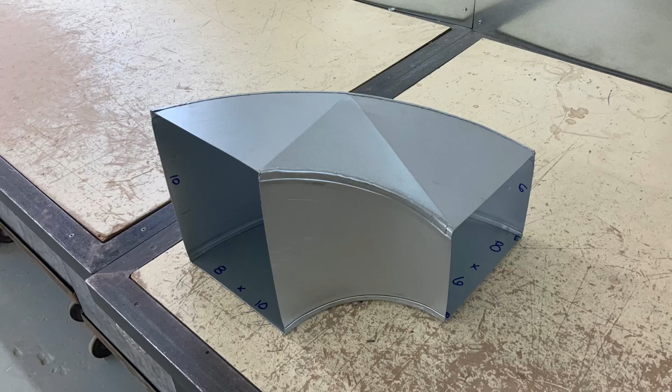Today's fabricated fitting is going to be an 8x10 to 8x6 drop cheek 90-degree elbow. First, I'm going to draw or sketch or scribe a 1-inch working line. And a 1/4 inch away from the edge of the sheet, I make my first mark.

Then I will put 8 inches, that's the dimension of the cheek. And then the throat dimension. Therefore, A to B is 8 inches, and B to C is your chosen throat radius. From C to B, strike an arc over 90 degrees.

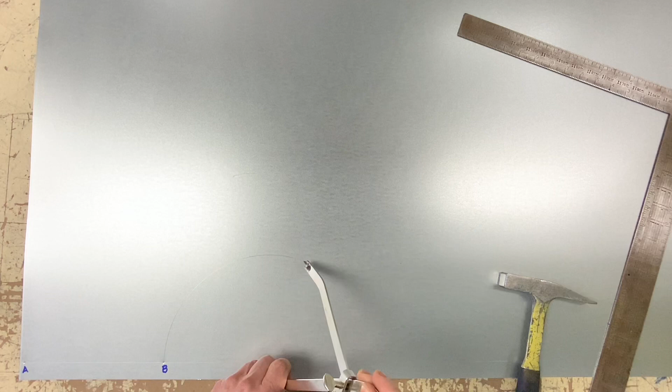And then set your dividers to C to A. Do the same thing. While you're there, add 3/16. And come back to B and add 3/16. At this point, square a line up from your throat radius.

D to E is 8 inches in distance. Now bisect B and D. You have now found F and G. F and G, by the way, is halfway through the fitting.

And we know that this fitting is dropping 4 inches. It is flat on bottom, but the top cheek is going down 4 inches. Therefore, halfway through the fitting, there's a 2-inch drop. The cheek is 8 inches, and the width at this point is 6, and on the other end was 10. So now I'm going to go ahead and fabricate my true length triangle.

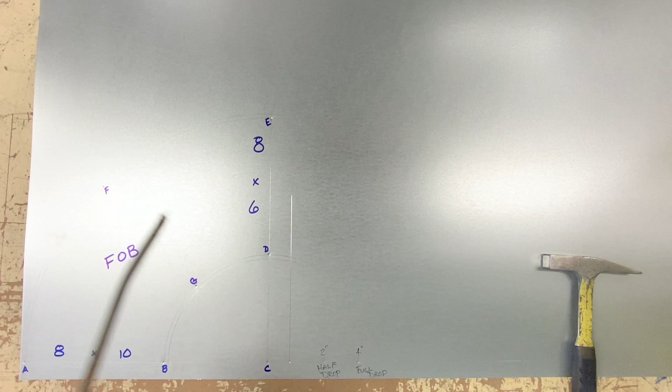As I said earlier, we're going from 6 to 10. Therefore, we need to figure out what the half drop is and the full drop. And in this case, the half drop will be 2 inches and the full drop will be 4 inches. Now with your dividers set from A to F, strike an arc vertically on your true length triangle. And this point is now AF.

We're going to do the same with BF, and it so happens to be at the same spot. And chances are, if you did your drawing properly, DF and EF will be the same also. As you can see, they are the same. This is only because the piece is square. It's 8 inches on both ends of the cheek.

Now with your divider set from B to G, do the same thing. Take that measurement line and bring it up vertically on your true length triangle. And do the same thing with GD. The last one is going to be from BD. Same thing. Bring it up vertically on your true length triangle. BD.

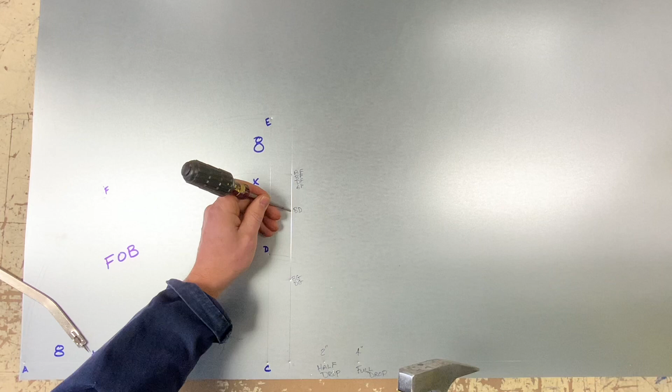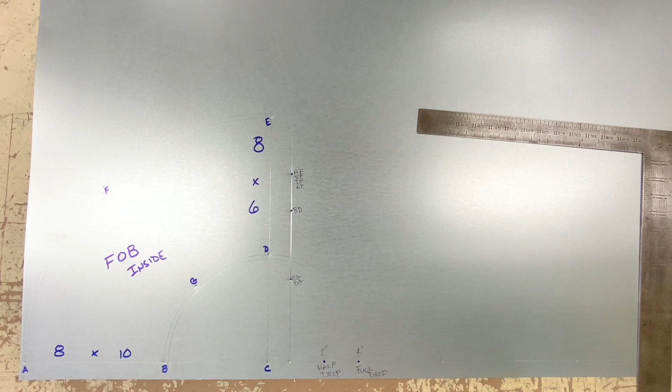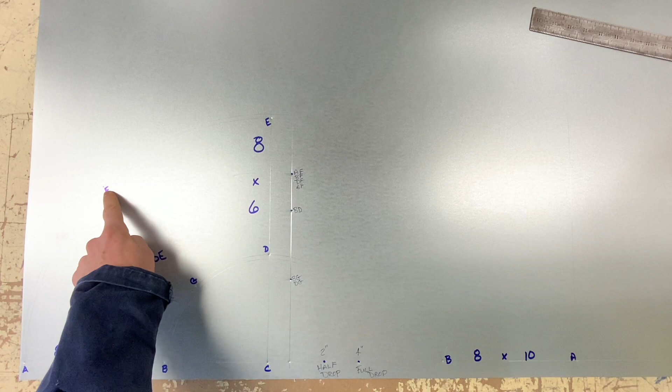So let's start fabricating the top cheek. So as you can see to my far right, I have point A, and then I measured off 8 inches to establish point B. Once you have A and B 8 inches apart, we're going to try to locate point F.

Now point F is halfway through the fitting, hence setting your dividers to the half drop. So with your dividers set to half drop and AF, BF and AF over the same half drops, you have now located point F.

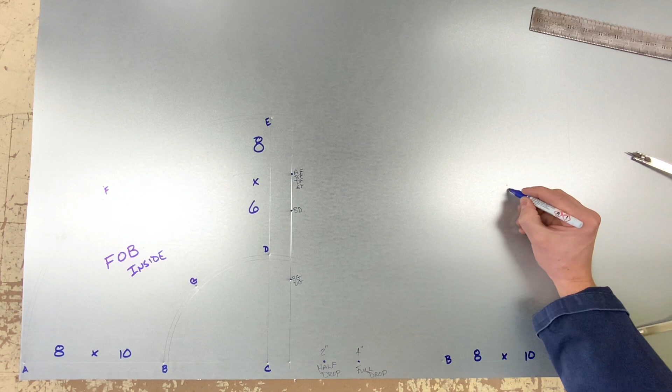Now that you have F, let's find D. Again, from F to D is over the last half drop. So it's over 2 inches. F towards D.

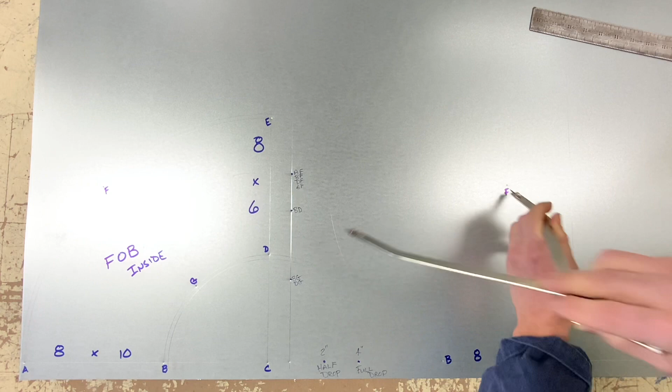Now we're going to use BD, but this one is going to be over a full drop. So set your dividers at BD over full drop, which is 4 inches. And that's your true length. This is now D.

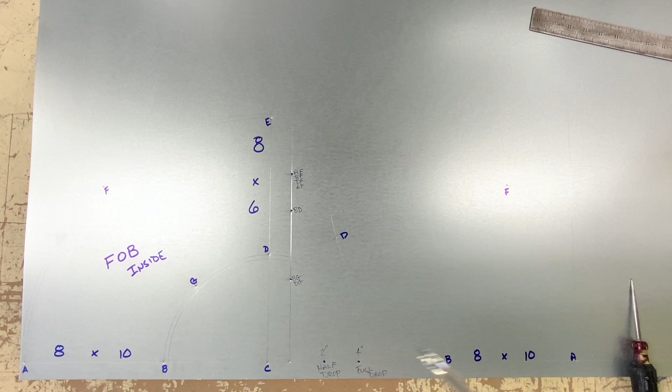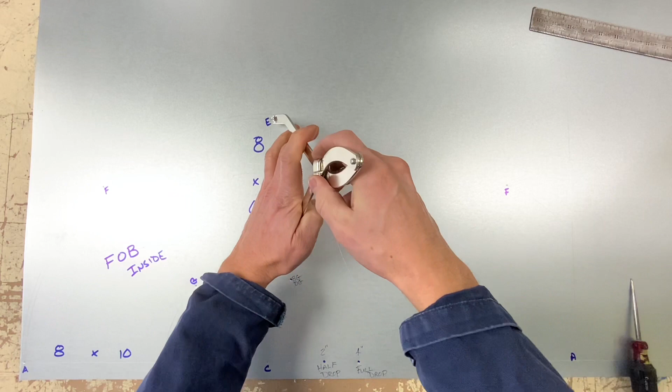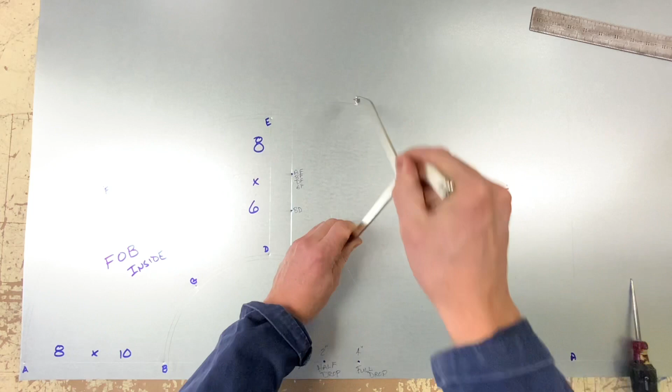From D to E is 8 inches. It is a true length. So set your dividers to 8 inches. Use D as your center point and strike an arc towards E. F to E is a half drop.

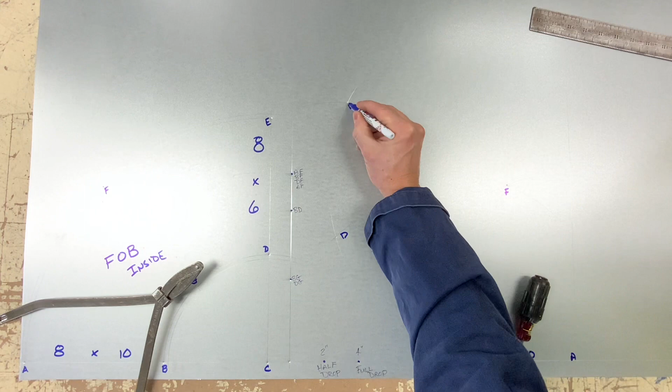Let's go try to find the throat G. I will be using B to G, which is over a half drop, and D to G, which is the other half drop. Where they meet, this is point G.

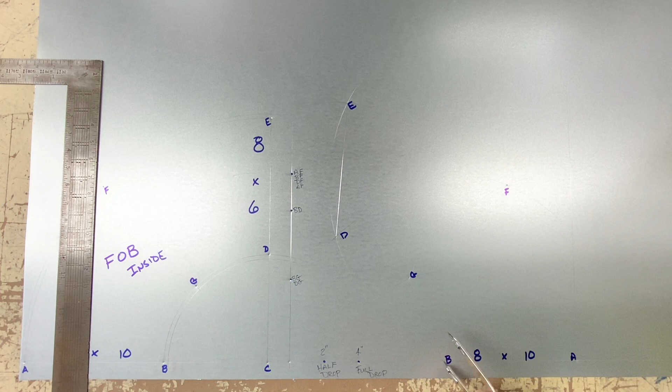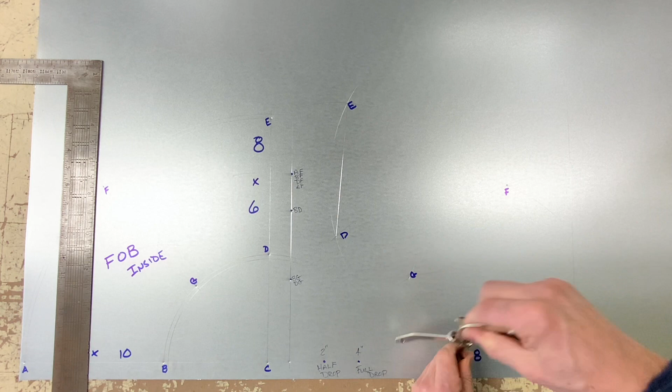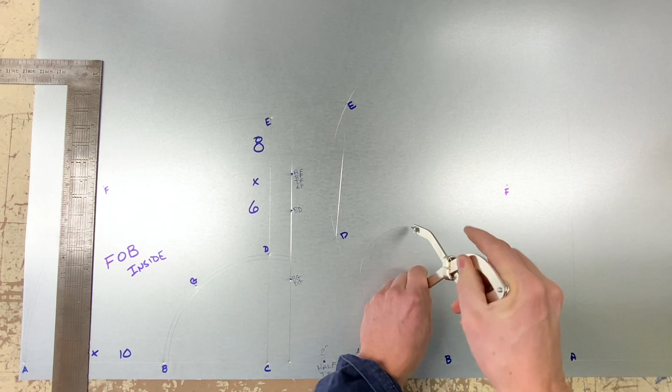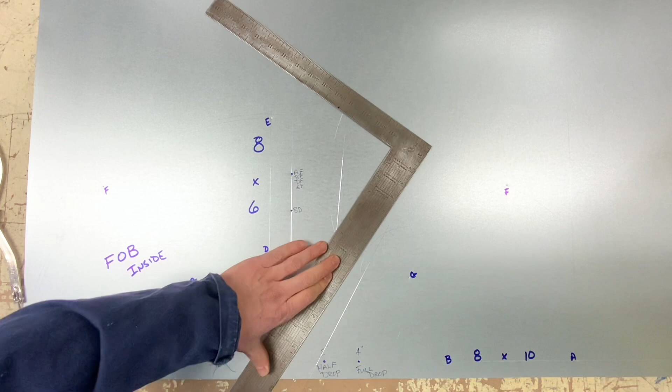The next thing to do is to connect the DGB, or the throat radius. And we do this by bisecting B to G and GD. I will draw both bisectors until they intersect. And where they intersect is where I will be swinging a radius to connect D, G, and B.

This is my throat radius. Set your dividers to either D, G, or B, and swing your arc to connect all 3 points. I will now add 3/16 to this for fabrication.

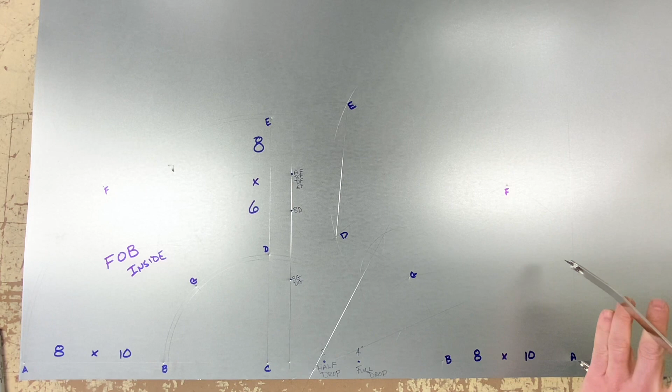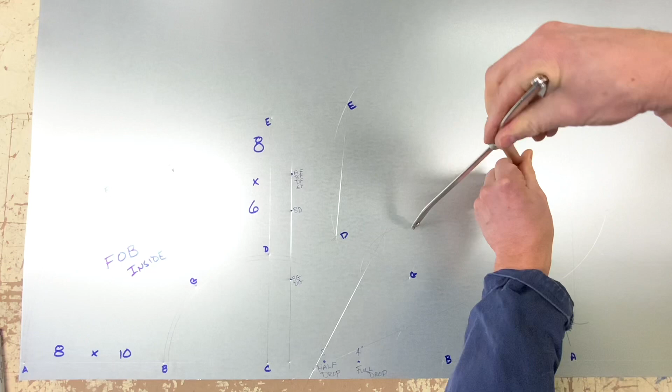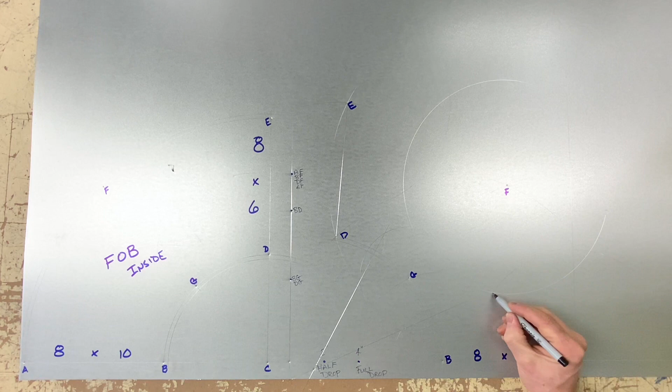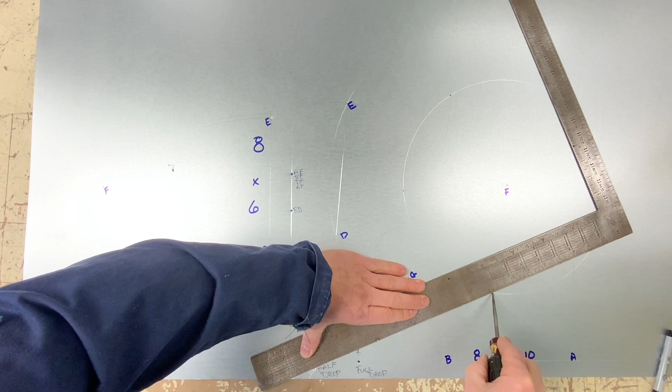Now we're going to do the same thing for the heel. We're going to bisect A to F and F to E. We will draw both bisector lines until they intersect. This now becomes your heel radius point. Swing through EFA and add 3/16 for fabrication, and you're almost done your cheek.

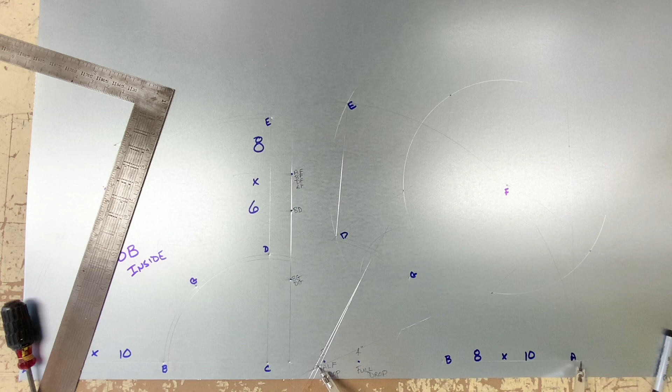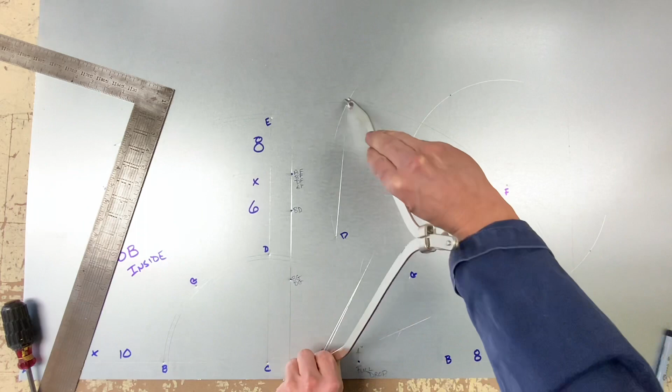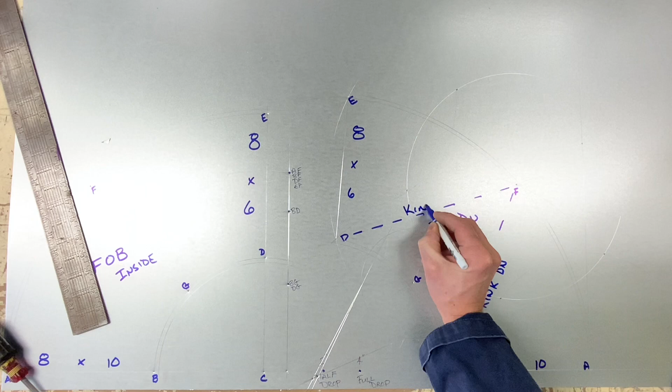So now you can see that I've added dotted lines. These are for kinking up or down. So now that I've quickly cut, I will finish cutting my radius curves.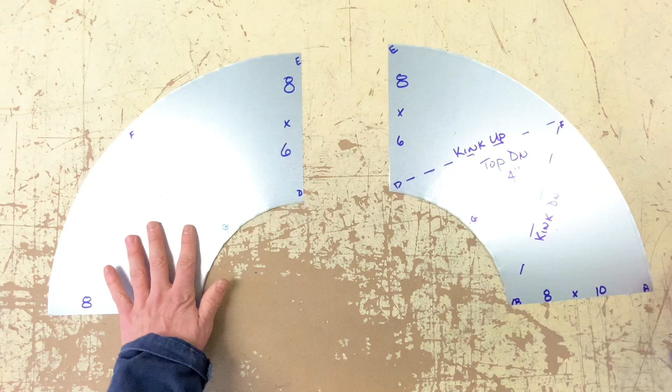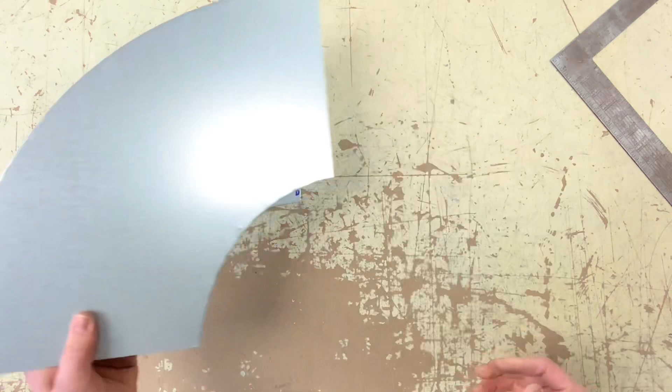Okay, now that the two patterns are cut, you can see that the throat radius is 6 inches and the cheek is 8. This one here, you can see that the developed pattern is not 90 degrees. That's because it's dropping. So now let's go and form the edges. Once you have formed the edges, we are ready to make the throat and heel.

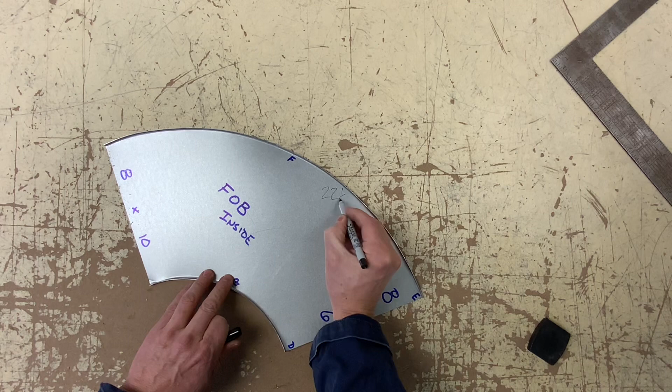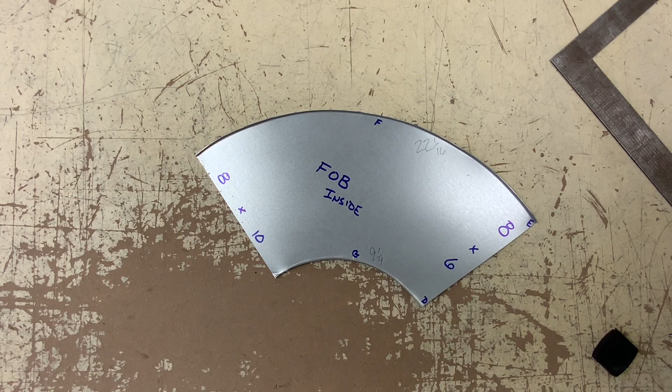I have chosen to use a Pee-wee tape for this. The heel measurement is going to be 22 1/16. And the throat measurement is 9 1/4. And you will notice that when you take these measurements, they come off the flat cheek. So I've cut 12 inches wide because my fitting is 10 inches and I needed to add for the Pittsburgh lock. This is my heel and the smaller one is the throat.

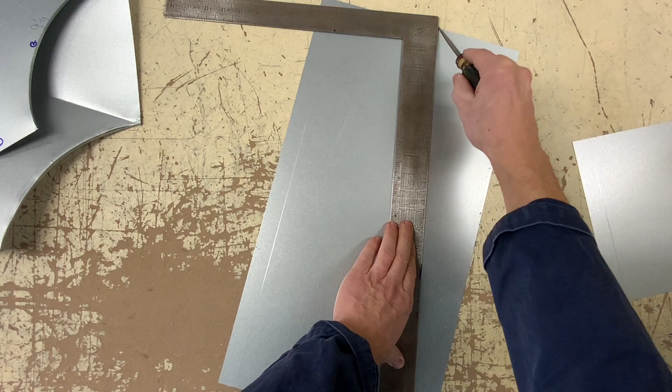Because it's flat on bottom, my Pittsburgh lock is going to be straight on one side. And it's going to be going from 10 to 6. So one end will be 10 inches wide. And on this end, 6 inches. Connect both of those points and add 1 inch for your lock. And this will be the pattern for your heel.

Now let's do the same thing for the throat. The throat is going to look exactly like that, but shorter. So you can see we get 6 and 10 on the other end. Ten. Six. Add your 1 inch. And you are ready to shear them.

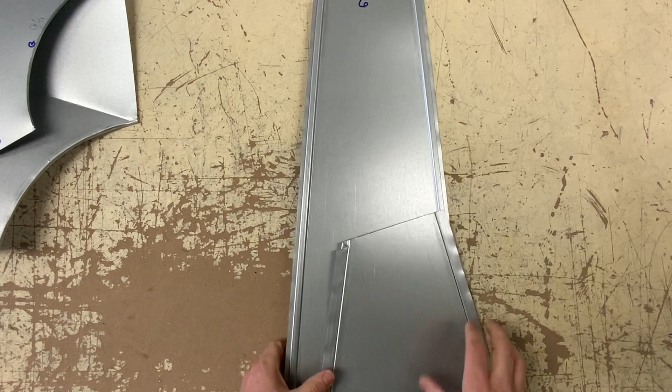Again, I'm using a marker only to explain what measurements are what, but I typically try to avoid using a marker on my fittings. So now that you've cut them and you ran them through the Pittsburgh lock machine, you are ready to roll them. And once they are rolled, you are ready to complete your fitting by assembling it.

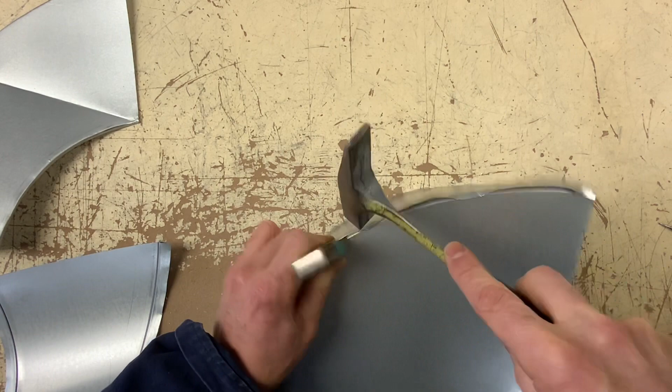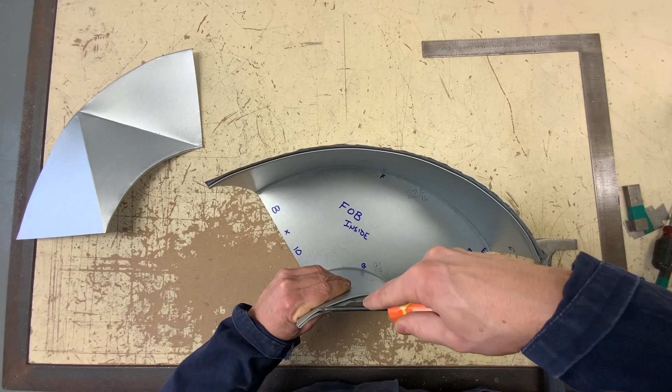Pay attention to which cheek goes on which side of your heel or throat. These fittings can be somewhat stubborn to put together at times, depending on the size and the amount of drop.

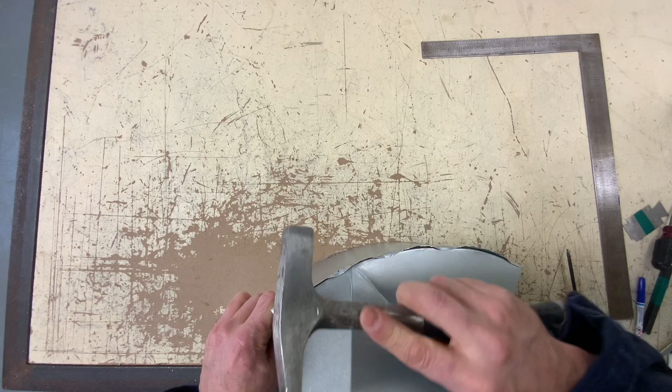I hope you were able to enjoy watching me fabricate one of these elbows. But if you really want to see the step-by-step, you might want to watch my other video on layout of one of these drop cheek elbows.

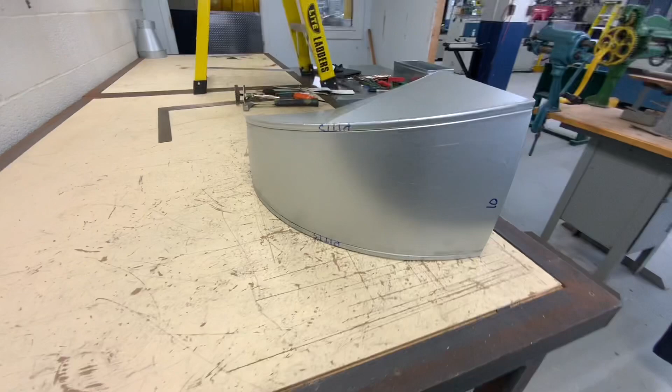In the trade, we refer to these elbows as flat on bottom. It can be top down 4 inches, or even top up 4 inches with the arrow going the other way.